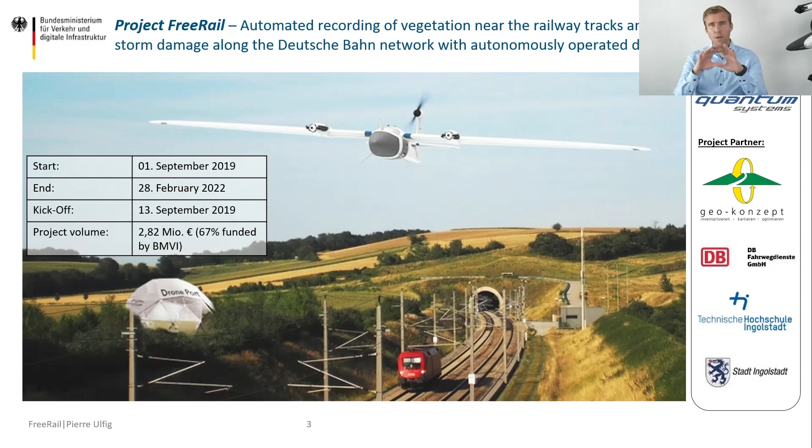So these are some additional facts regarding the project you can see here. It's a huge project. We have 11 main working packages, 68 sub-working packages, and all in all 279 cumulative months, and it's quite a lot. And the project location will be in Ingolstadt or near Ingolstadt, or here at our headquarters, Gilching near Munich.

But let's step in and give you a better idea of what is the challenge of the Deutsche Bahn Fahrwegdienste and which constraints they have to solve. So the railway network, and don't forget that we are talking about 34,000 kilometers of nationwide railway network. That's enormously much. And additionally to that, at least once a year the inspection on foot or per helicopter with documentation and evaluation has to be done for the whole vegetation, to find out what is the vegetation condition over these 34,000 kilometers of nationwide railway network.

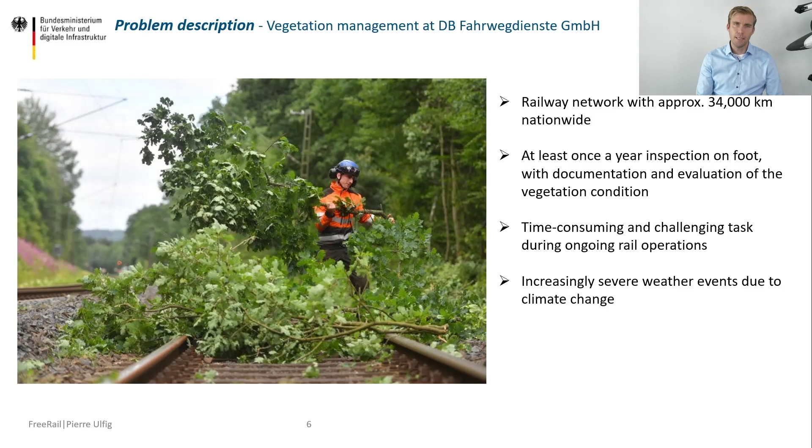This is, as you can imagine, time consuming and also a challenging task due to the fact that this has to be mostly done during ongoing rail operations. And another fact is that due to climate change, an increasing working package is waiting for the employees of the Deutsche Bahn Fahrwegdienste, which makes it not easier for them to solve these problems.

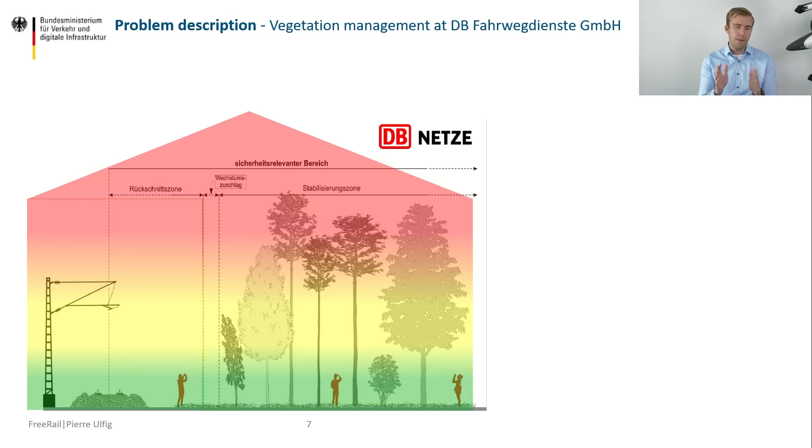So this is the challenge that they have to face, and even though this is a German picture with German description, it shows you perfectly the safety relevant areas. They have to take care of the distance, of the heights of the vegetation in different safety areas, and with the help of the Trinity, as well as a special payload. No, it's not a special payload. It's a normal RGB camera, the Sony UMC.

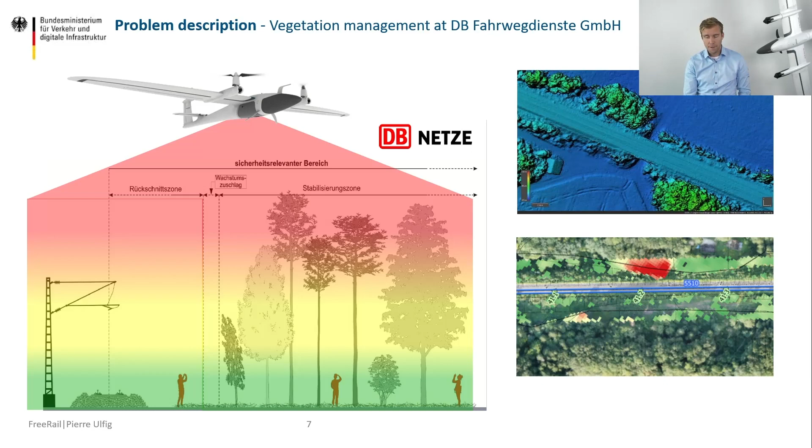You can create a lot of different models, like digital surface models or digital terrain models. And with the help of these models, you can easily analyze and evaluate the height and the distance. This is what you can see here on the right hand side in these pictures. And this will help to analyze the safety relevant areas, and to get a better idea in which certain areas a problem exists, or the distance is too short, where they have to react. This is all about that.

So our project objective is to develop, on the one hand, a scientific and technical basis for future fully automated drone-based systems for digitalized vegetation control, and on the other hand, to develop a demonstrator during the testing phase. This is what we are trying to do in this project, and we are also facing the problem that all these different subsystems, we will take a closer look at that a little bit later, should be fully automated, and the whole operational process should have a high level of automatization.

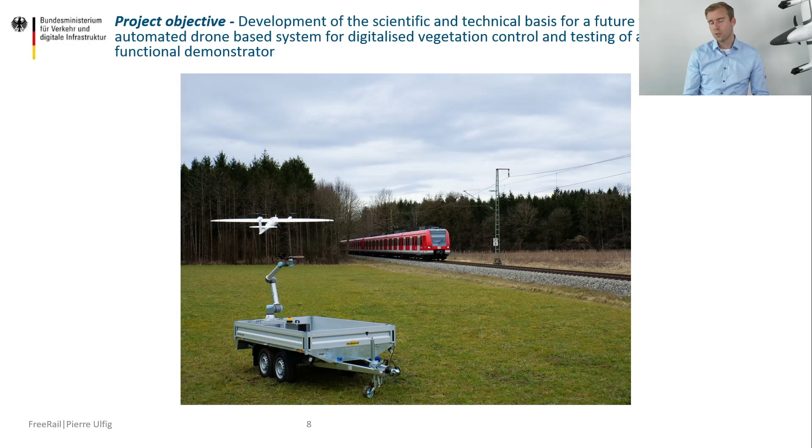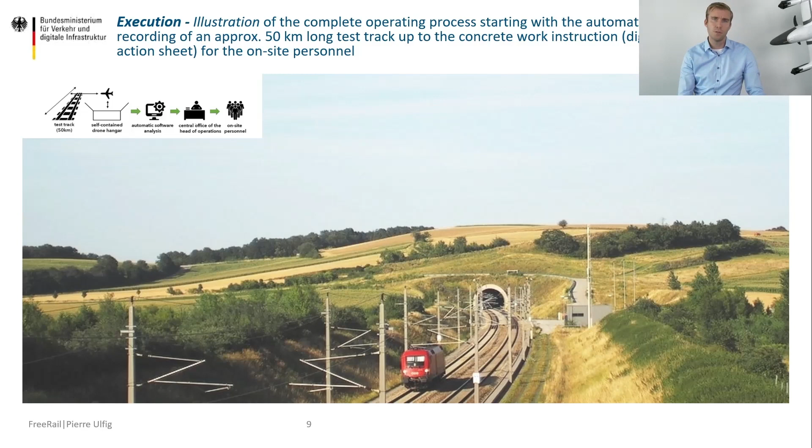So, but what does it mean in detail? You can see it here a little bit in short, but we will step into each process a little bit deeper. With this slide, I want to illustrate the complete and also complex operating process, starting from the drone, to collecting the data, to submitting this to the Deutsche Bahn Fahrwegdienste, and putting their personnel on site. But let's start with the mobile drone port, which is located near the railway line. And what you can see here is the trailer.

The drone port consists of several high-tech things, and this is very important to know: the drone port has several functions, not only housing the drone and protecting it from different weather conditions, but it also acts as a relay station for the transmission, and also for charging the drone, and for the self-sufficient charging of the batteries. And the cool thing is the following, and we will see it a little bit better in the upcoming video. But let me show you here in the slide.

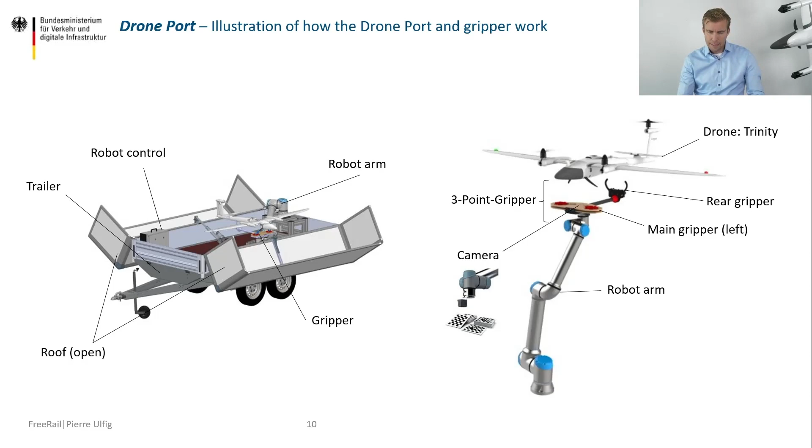We have the camera, which is integrated here in this robot arm, and this robot arm follows exactly the movement of the drone. And the robot arm is equipped with a gripper, you can see it here. It's a 3-point gripper, and to get a better idea how it looks and how it reacts, we have the following video.

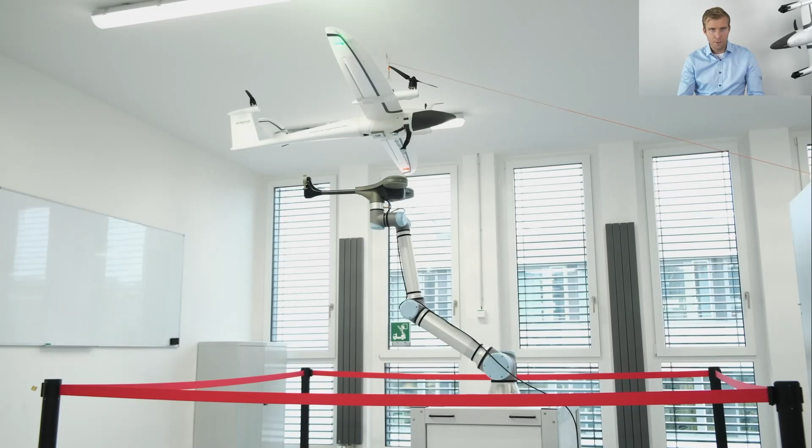This is filmed indoors, so you can see how smoothly the robot arm reacts and tries to catch the Trinity as it moves. And you can see our testing outside. So the arm follows the Trinity, and then has the chance to grip and catch the Trinity and put it safely into the drone port.

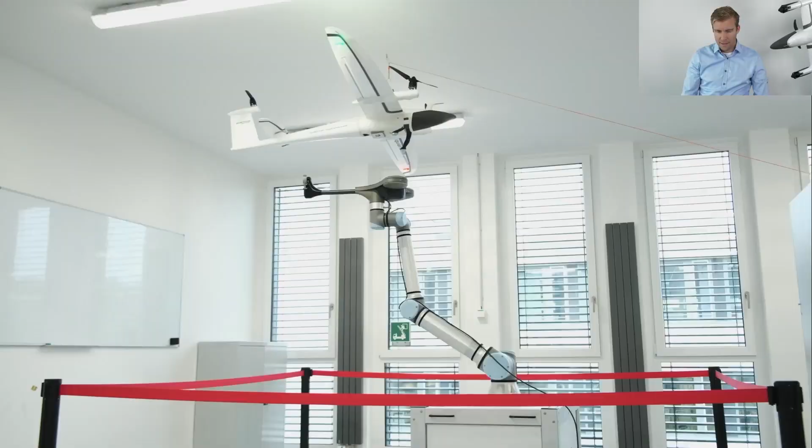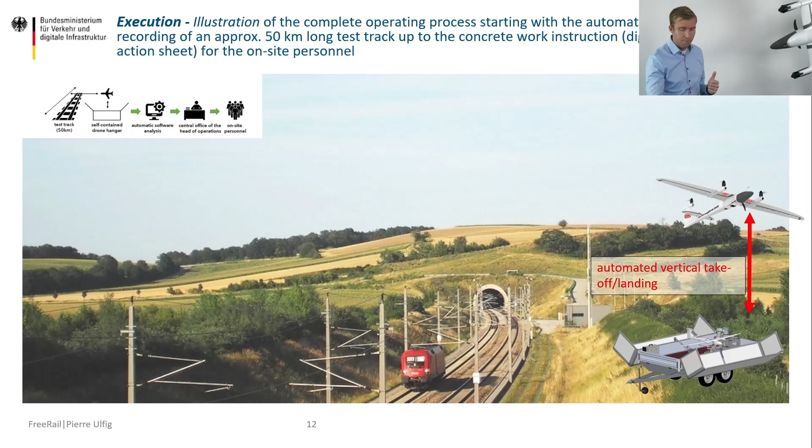So after that, the Trinity will take off. And for those of you who never saw the Trinity flying, or aren't familiar with the technology behind the Trinity, let's take a closer look at this slide. So the Trinity is a special drone. We call it a vertical takeoff and landing fixed wing UAV.

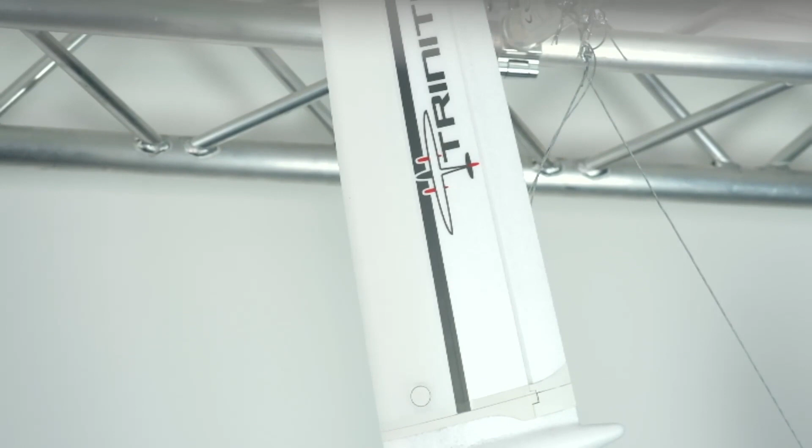What does it mean? The Trinity combines the advantages of two systems. First of all, it can vertically start and land like a helicopter, and after the transition phase, it goes into the horizontal efficient flight mode, and uses the efficiency of an airplane.

And this is an important thing, because exactly with this technology, with the help of the Trinity, we can fly 50, 60, 70 kilometers, which is necessary in this project, very easily. So covering these 50 kilometers, which is stated in this project, can be easily done with the help of the Trinity F90 Plus, and moreover it can fly a longer distance than a copter.

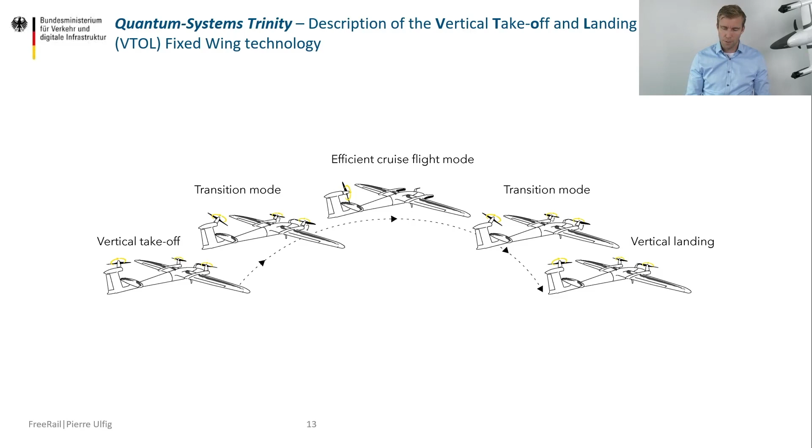The Trinity was especially designed for covering large areas, for large distances. So this is the perfect drone for us in this project. And also giving you here a chance to get a better idea how this works: the vertical takeoff, landing, and after the transition phase, going into horizontal flight.

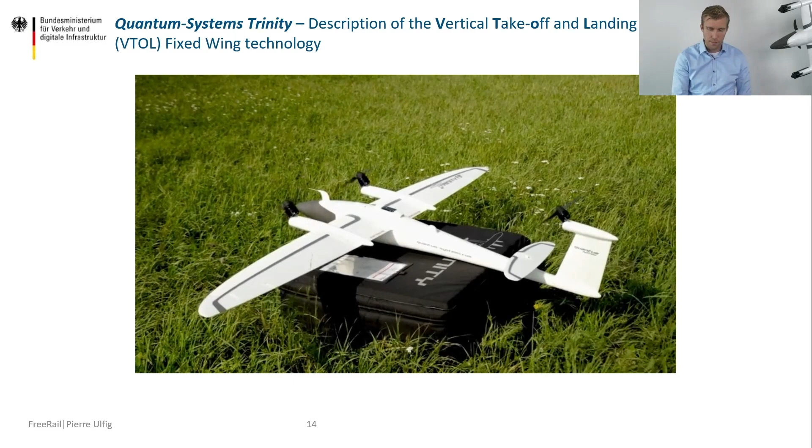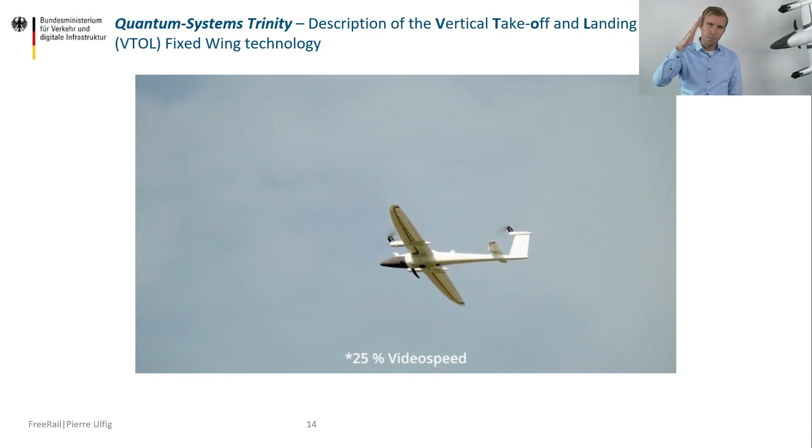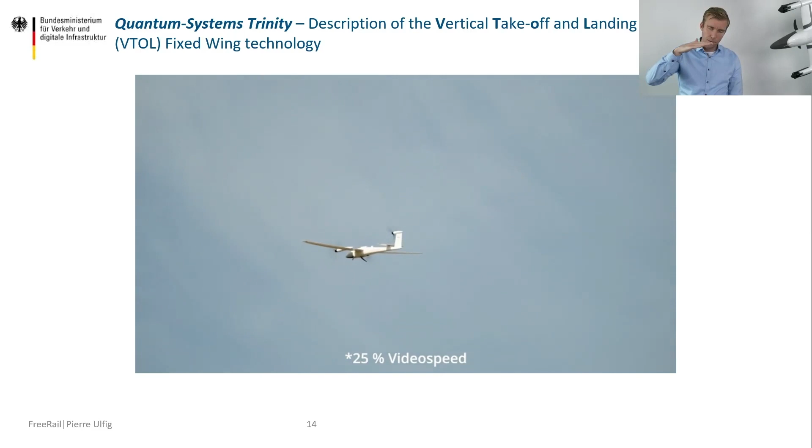Here a little video. Here we can see the takeoff, all the motors put the Trinity up, and now we have a slow-mo, and then the motors tilt forward. You can see it here on the side. The transition phase is now performed, and then it goes into horizontal flight with the help of the rear motor, and goes into the very efficient flight mode.

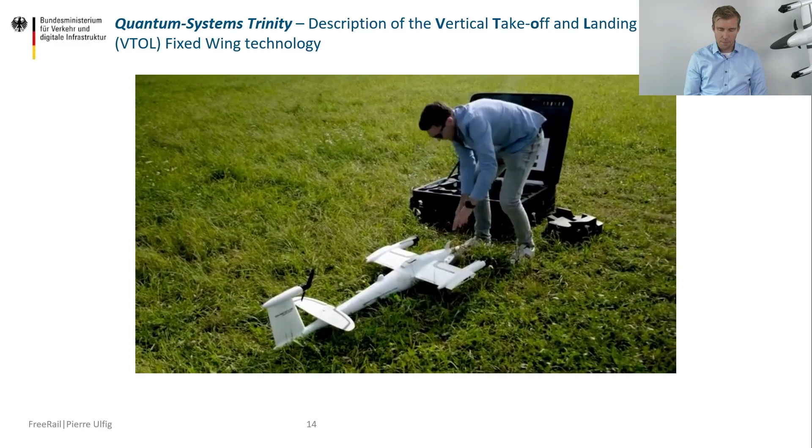Here it's flying. We will also see the landing, and this is cool to see that it's very easy to disassemble, to pack it in the box, and in a few minutes here we are. So this is the Trinity.

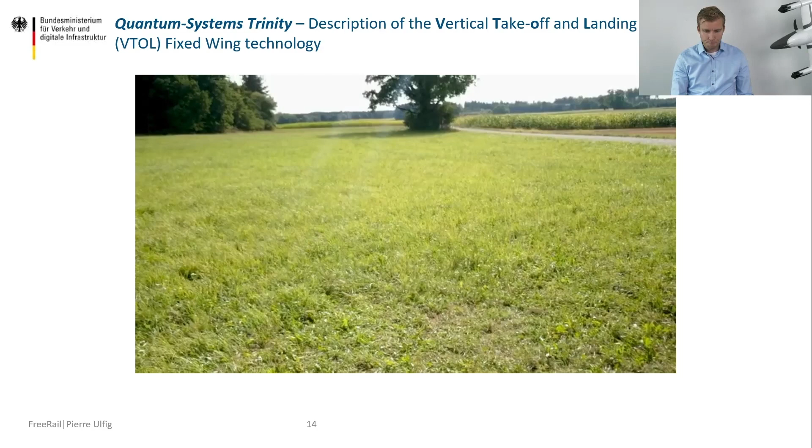So let's go on in the process. The Trinity took off and performs the automated mission execution, so the BVLOS flight. As I said, 50 kilometers roundabout. This is what we stated in the project, and the mission will perform takeoff. We then have the planned mission, which was planned via our mission planning software QBase.

Collecting the data, the terrain model, which I showed you before, and the payload compartment with the Sony UMC, the RGB camera. Then the Trinity will come back. The recorded data are then transmitted to the server, where the image analyzer starts. What does it mean? The analysis of the data.

It is, on the one hand, the automatic generation of orthophotos, but also classification and assignment of structures, track detection, detection of vegetation areas, obstacle detection, pattern recognition, and some other analyzing processes. Most of these analyses are done by artificial intelligence, and that is a huge advantage, not to analyze it manually. That makes it easier to give a quicker response to the Deutsche Bahn.

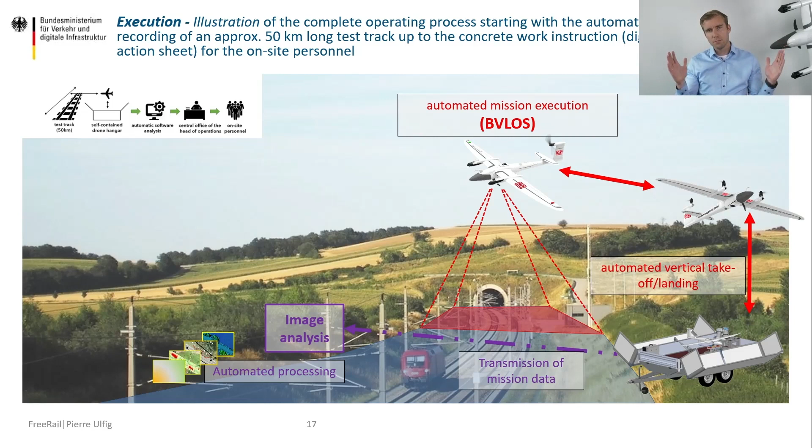Because what we're trying to do next is to give what we call a digital action sheet with recommendations for actions. As we saw in the picture, where are the crucial areas, the crucial locations, and this digital action sheet is created, which can then be used by the on-site personnel of the Deutsche Bahn Fahrwegdienste. As I said, to sum it up, we also have a survey in this project, and we will also put some data in the public mCloud.

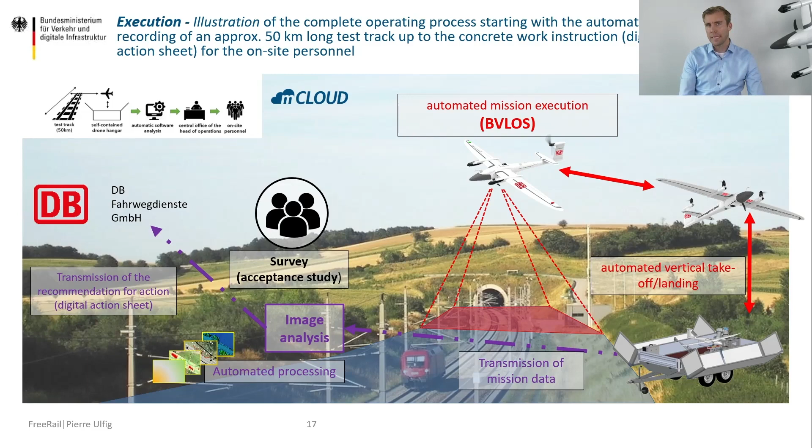As I said at the beginning, here a deeper insight into the project status, where we are standing. We started the project in September 2019, so one year is over, and until the end of this year we try to finish the development of the different subsystems: the drone port, the robot arm, the artificial intelligence, the data processing, the analysis of the collected data.

And then we have two months to integrate all the subsystems and bring them together. And then the very interesting part, and I'm excited to start the testing phase, which starts in March 2021, and we have 12 months to test the whole system, beginning from line of sight flights to BVLOS flights, and to increase the whole automation process.

Let me also add a few challenges we had till now. First of all, the level of automatization is one thing. To reach a high level of automatization is our goal, our aim for the entire process. Performing all these steps, starting the drone manually, analyzing the data, that's feasible and that's easy. But the challenge comes up when you try to execute the entire process in an automated way.

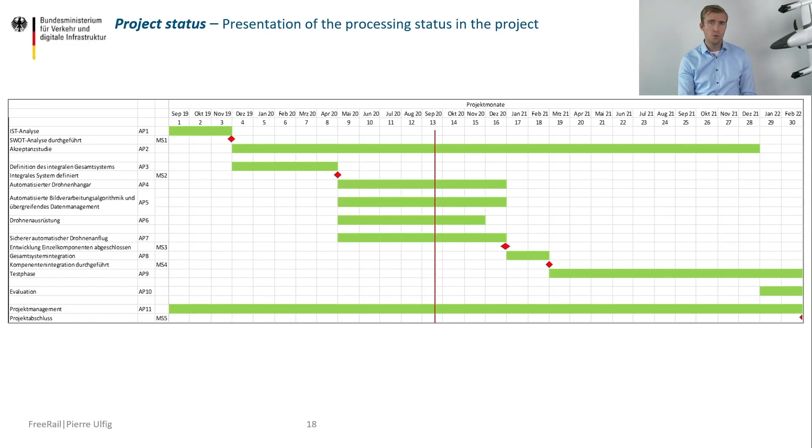So, Pierre, Matthias, first of all, thank you very much for the presentation and for introducing the project FreeRail, which I personally like a lot, because I travel by train a lot, so I think it's in the interest of everyone that rail tracks are free. We have a few questions from the audience. One question is, why is a drone port necessary at all? Why all that effort? Yeah, I think it's a very technical question, so I will take it.

Why is it necessary? The Trinity, as you see it in the background, has a repetition accuracy of around ±2 meters. So if you fly the mission with the Trinity and fly back to your landing point, you have an accuracy of 2 meters in the autoland mode. That means you need something adaptive which is able to adapt with the gripper and the end effector to the drone. In order to do that, you need the robotic arm or something else. We decided to have this robotic arm with different kinds of joints, to have different degrees of freedom to grip the drone finally.